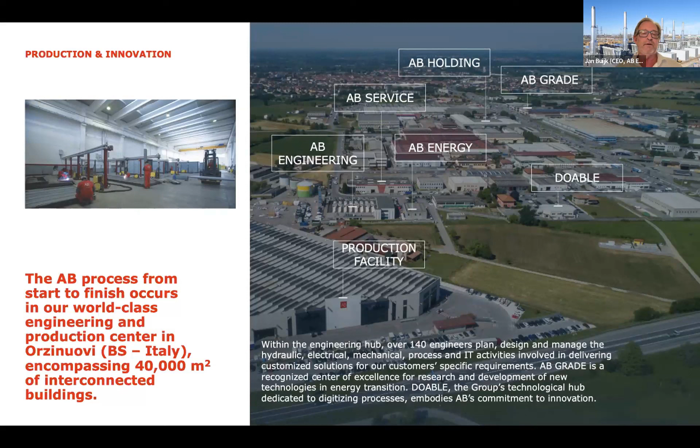Quick introduction to AB. First and foremost, the people. Company with about 1,200 people, more than 140 engineers active in product development and engineering, and more than 300 service technicians around the world. AB is headquartered in the town of Orzinuovi, which is about 45 minutes east of Milan in Italy. And here you see some of the facilities. It's like Monopoly, where the AB organization over the years slowly but surely is taking over all the buildings in an industrial area around Orzinuovi. In the foreground is our main production facility, a large 40,000 square meter facility. Currently present in 20 countries around the world, primarily Europe and the Americas, so North as well as South America.

We are a hardware business. The core business for many years has been pre-engineered, packaged, containerized cogeneration systems for natural gas, containing everything: the generator set, the controls, heat recovery equipment, ventilation systems, operating on biogas, natural gas, landfill gas. Also, we have greenhouse-specific system design for installation inside the greenhouse with exhaust heat recovery, exhaust cleaning, specifically dedicated for utilization in the greenhouse sector. And then also special gas operation, such as hydrogen, syngas, and other combustible fuels.

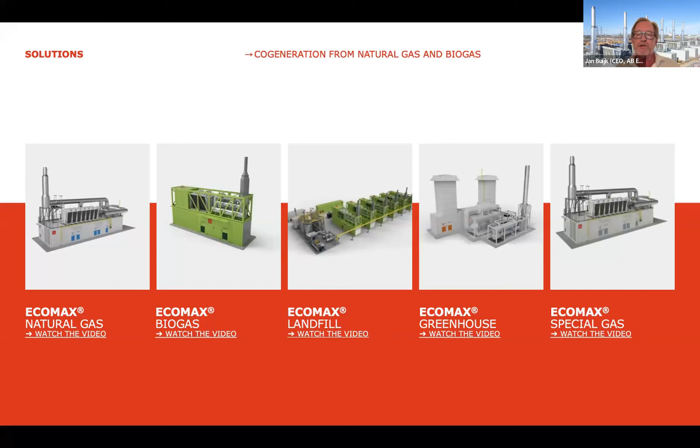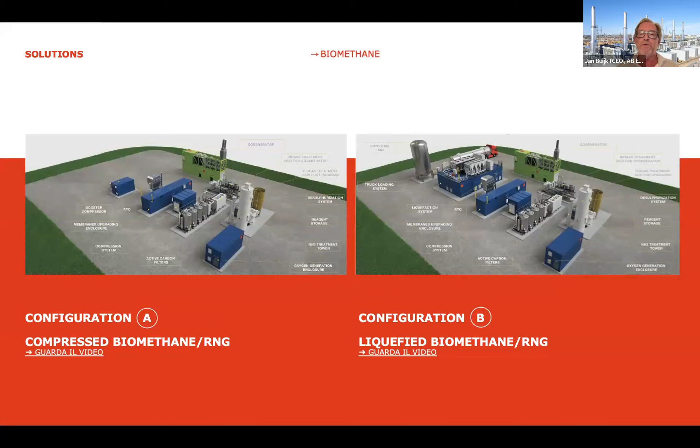More recently, we've entered the RNG space, where we would again have the pre-engineered containerized solutions, but in this case to upgrade biogas to biomethane or RNG, and also be able to liquefy the biomethane. And at AB, we're also the publisher of the Net Zero portal that is focused on biogas, biomethane, cogeneration, with more than 2,000 videos that can be viewed with case studies of the different applications.

It was also one of the first settlements, Fort Calgary, some centuries ago, and the area some years ago was kind of cut off from the main downtown area, and traditionally being an industrial area, started to deteriorate quite badly, with some crime areas, and that resulted in 2005 in the city council deciding to proceed with a redevelopment plan of the area, and so by 2005 they started the planning to really redevelop the area.

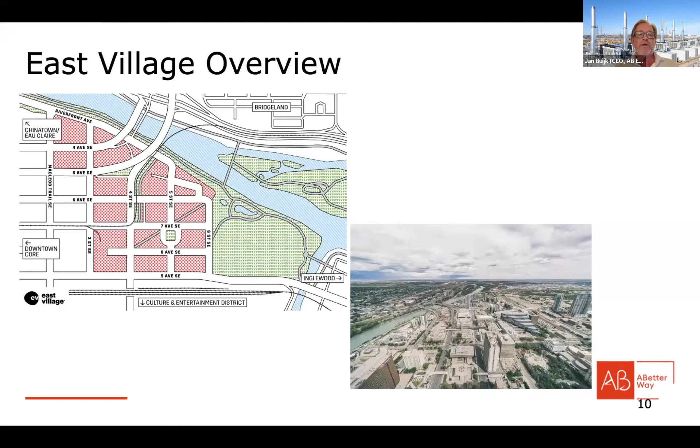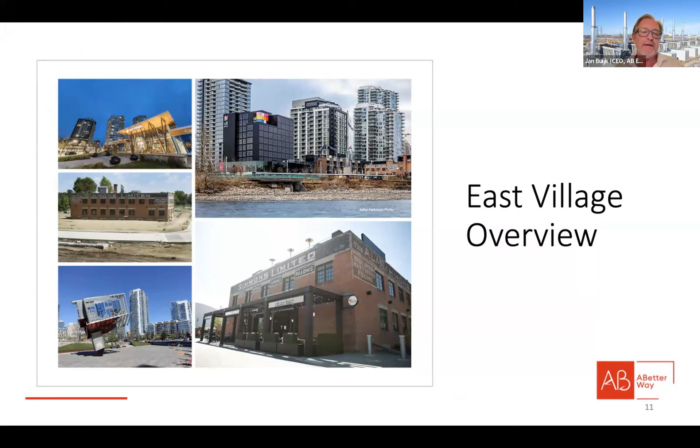And that has resulted in one of the trendier areas in Calgary right now. So older industrial buildings were completely renovated, new modern facilities, condominiums, housing. So it has become quite a unique area just bordering the Calgary downtown area, and this then also resulted in 2005 that the studies began by ENMAX, the electric utility in Calgary, to evaluate the potential of district energy in this area.

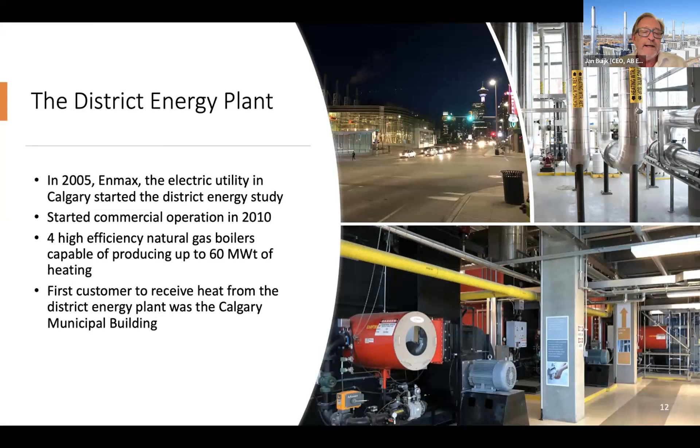It was in 2010 that the district energy system was in place and started commercial operation. It has been the cornerstone of this area. By 2010 the first building was connected to the district energy system. At that time it had 4 high-efficiency natural gas boilers that combined were able to produce up to 60 megawatts thermal of hot water, of heating.

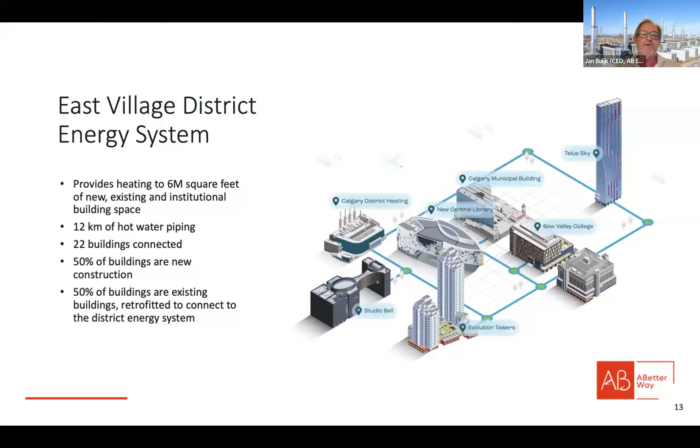And then, if you look at the system itself, there are currently 22 buildings connected, about 12 kilometers of hot water piping that connect these buildings. About 50% is new construction, and then 50% is existing buildings that have been retrofitted to be able to connect to the district energy system. Altogether, about 6 million square feet of building space is currently heated through this district energy plant.

So the CHP plant that was added to the district energy center is a Jenbacher Model 620. Unfortunately, the building would not facilitate installing one of our pre-engineered systems. So this is traditional ship loose equipment, generator set, heat recovery equipment, SCR, that then has to be custom built, custom installed on site.

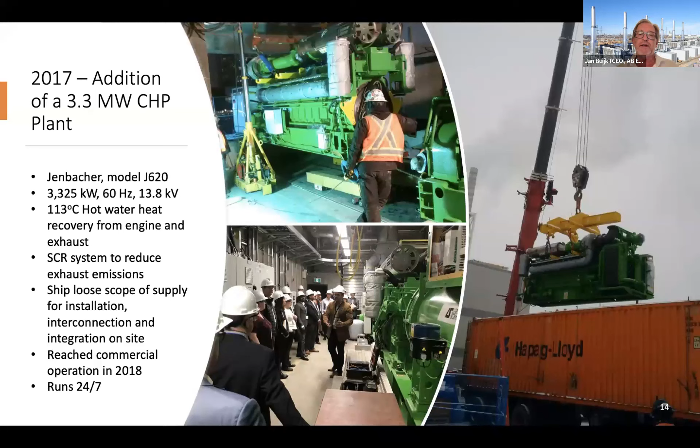This system reached commercial operation in 2018 and is currently running 24/7, providing heat into the district energy loop. Heat recovery is producing hot water at 113 degrees Celsius, and electricity is running behind the meter, so the system can operate in thermal load following mode, electrical load following mode, or a fixed set point on power production, but it's displacing electricity otherwise purchased from the grid.

So why would somebody add CHP to a district energy system? It will lower energy cost. It will improve power reliability. The natural gas grid is exponentially more reliable than the electrical grid, so it will improve the resilience of the system, and it will improve power quality. It also will facilitate transition to renewable fuels, and that is something that the Calgary District Energy Center is also looking at. Low carbon fuels, whether it's RNG, whether it's hydrogen, looking at geothermal, solar. So like most district energy systems around the world, exploring different sources of heat to decarbonize the system.

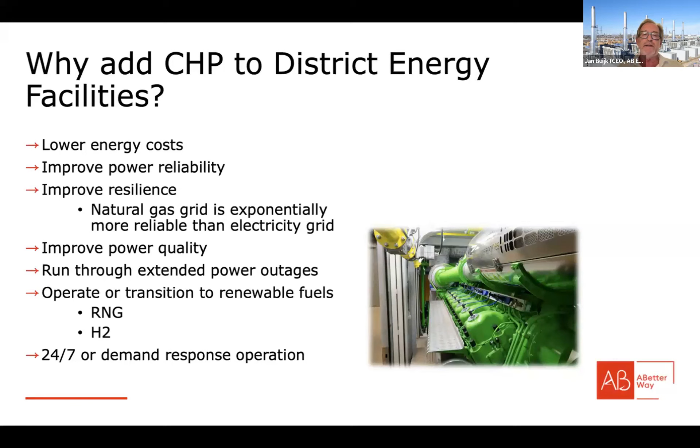And one thing that is also noteworthy is that a few years ago, during the flooding of downtown Calgary, although the district energy center had a lot of flooding into their basement, the system actually did survive through that period and continued to operate despite the flooding of the downtown area.